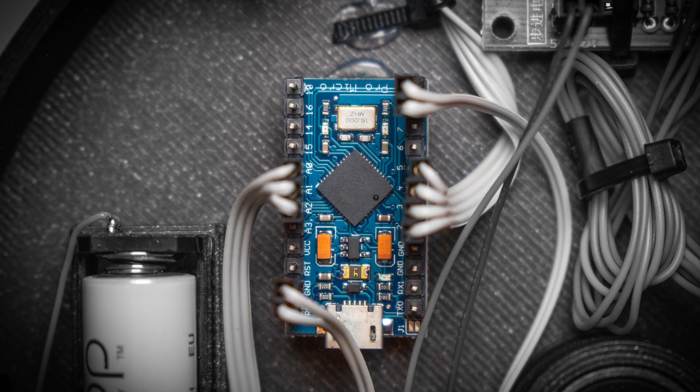I still had a Pro Micro lying around, a cheap 32U4 based model from an earlier build project of Tom Stanton's awesome joystick, which has in the meantime evolved from a pure stick into more of a yoke version, to cope with my aircraft preferences in Microsoft Flight Simulator beta.

And yes, it is currently very broken. Shout out to Tom for his awesome projects and his work in general. And if you don't know him, where have you been? I mean, seriously. But honestly, every small Arduino would work fine here.

And finally, the power supply. As stated above, I'm living in my kind of fantasy world where power is not an issue at all and where simplicity is king. I don't want four batteries tangled up in every single project I do, then virtually disappearing forever from my stockpile. So I like to keep things simple and minimal and reduce the number of batteries wherever I can.

This was a very bad decision, as the motor draws a lot of power, and simply powering all parts and the motor from one battery is not enough. Especially as I wanted to drive the supply line with 5 volts, which means the voltage of the battery needs to be boosted from 1.5, or rather 1.2 in case of a rechargeable battery, up to 5 volts. The bigger the voltage gap, the more amperes need to be pulled from the primary power source to substitute the voltage difference. It's possible to achieve this, but only if all components, including the battery, can handle the demands. It definitely gets more challenging to make it work.

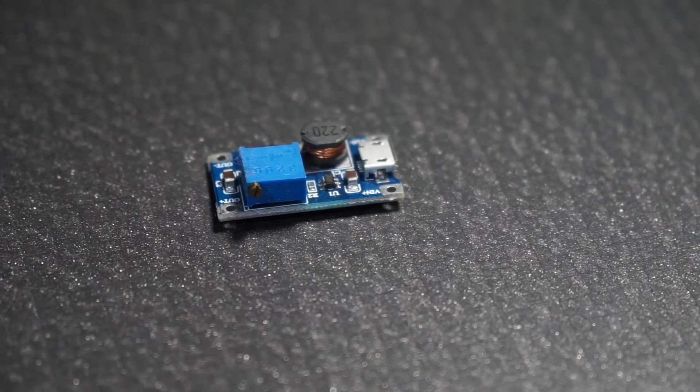Well, in hindsight, I was actually doing the opposite of keeping it simple. I should have just added another battery from the start. Lesson learned. Anyway, I was first using some voltage boosters I had lying around, but the first attempts were unspectacular, and actually nothing was working.

Turns out boosting from as low as 1.2 volts is actually not so simple and common for those circuitries, and it took me a couple of attempts to find a circuitry that was able to maintain even the unloaded 5 volts from the battery. I finally went to Pololu, which has a great range of cheap, small but yet powerful power conversion boards available, and a couple of them are also capable of boosting from 1.5 or 1.2 volts, which was exactly what I needed.

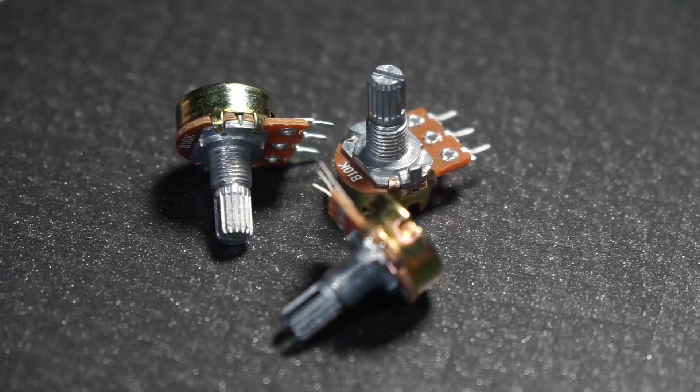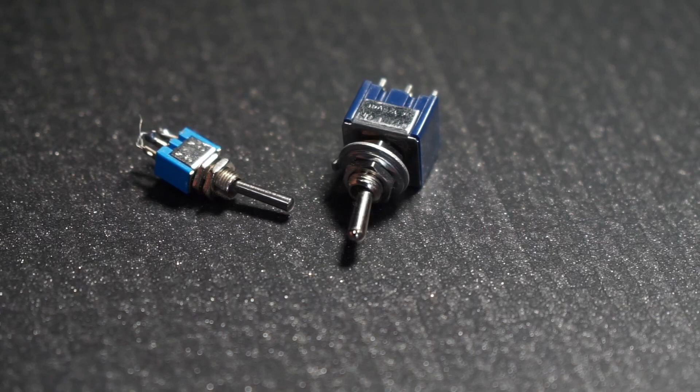Last but not least, for controlling the speed, a simple potentiometer would do. I always have some basic ones in stock for these kinds of projects. And then for changing directions, there is the need for a small switch, and I also have those in stock. And then finally, I wanted to have a flip switch to disconnect the battery from any consumer at all, so the batteries aren't drained over time when I'm not using this rotating table.

Chapter 3: The 3D model. So with my list of components finalized, it was time to start designing the case.

That includes a bottom part, the stator, a movable top part, the rotator, a mounting plate or control plate for mounting the potentiometer, the button and the flip switch, mounts for the motor and the rest of the parts, and a suspension for the rotator so it can rotate freely with the ability to support even a bit heavier models. And that's it. As always, I did my design work in Fusion 360.

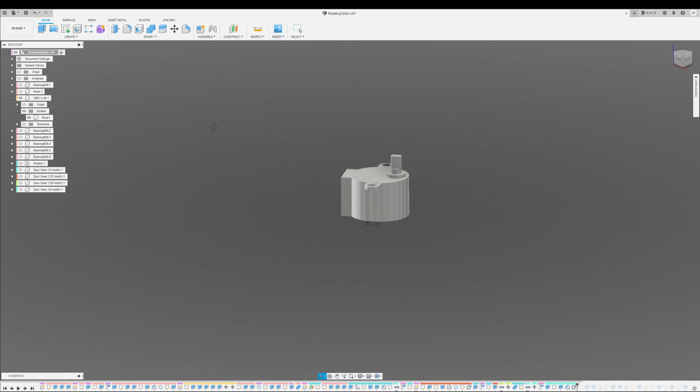For this workflow that I'm using, it is very recommended to mock up all the components that need to be mounted later. This way I was able to shift and push the parts around until I found a setup that made sense to me. Except the positioning of the motor and the controls, only the placement of the Arduino was important, so that I would be able to mount USB cables to it later to program it.

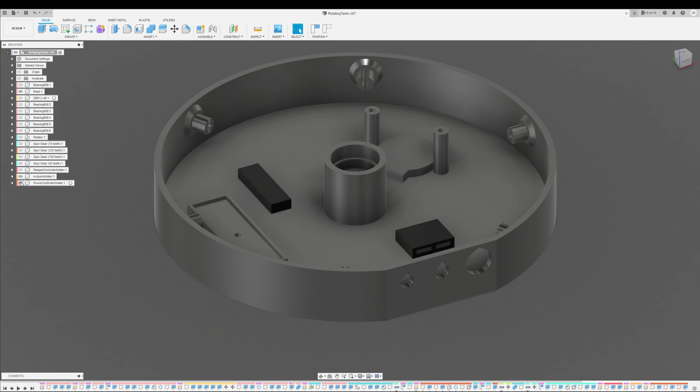To keep it simple and also flexible, I decided against precise mounts for all components and instead printed a couple of these profiles that I glued into the base and then fixed the PCBs with zip ties.

For the gears, I used the Fusion gear scripts. I didn't pay too much attention in the beginning to the ratios and the sizes of the two just yet, as I was certain they would be off anyways. And to be honest, it's simple enough to print other ratios later.

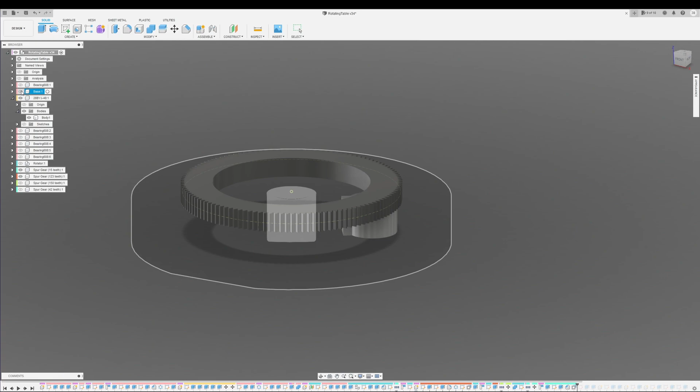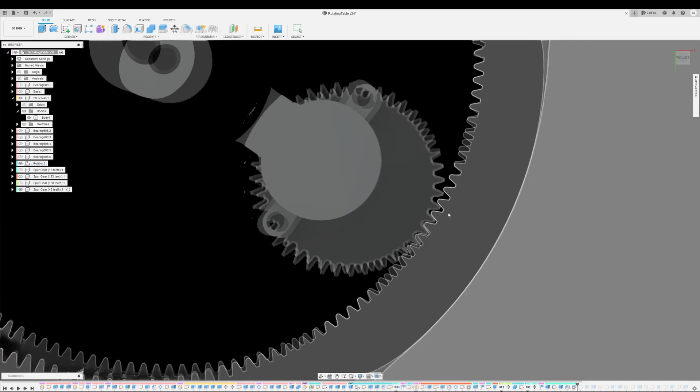I am not aware of a proper way to print the outside gear, which is facing inwards, so I designed just a negative shape and subtracted that from the rotator internal parts. I am no mechanical engineer, but I'm pretty certain this messes up the weird magic that gears involve. But YouTube is full of tutorials using this approach, so it cannot be bad, right?

Chapter 4, the build. So this model after printing is relatively simple to clean up, only a bit of support material under the bearings. Then mounting the parts for the control panel.

And then finally mounting the bearings. Initially I wanted to screw those in place, but that was actually not necessary.

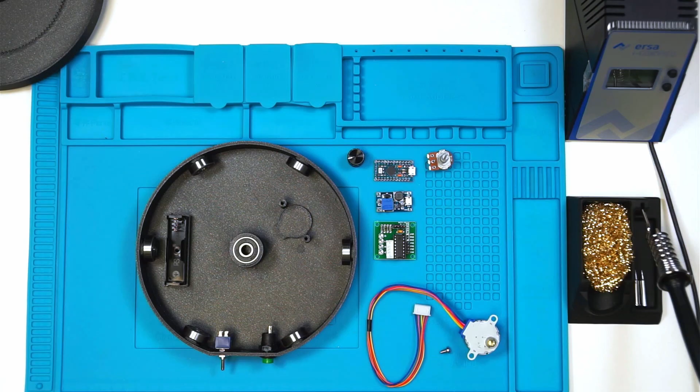So as mentioned in the beginning, I didn't want to fix all the positions of the components already in the design, so that is why I'm now gluing those frames into the base and then attaching the components to those frames.

So I have to say this looks relatively tidy and organized. And I was actually hoping to keep this standard for the rest of the wiring, but you will see in a moment that I, to my own personal judgment, think that I failed with that. Anyways.

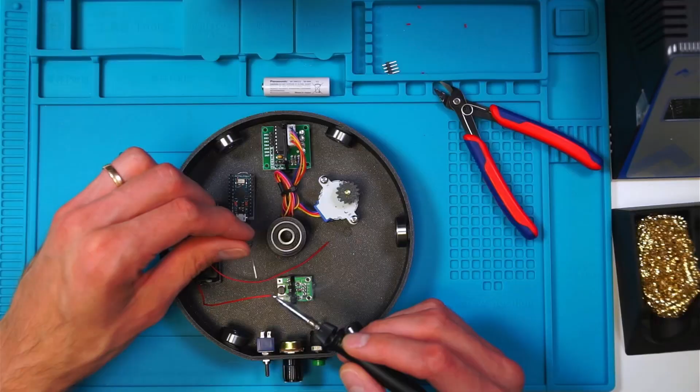At this point I decided that it is time to check if my power supply circuitry actually works before I continue any further magic with the motor and the controls.

So as you can see, I pulled out the big guns and started crimping. I definitely favor cable connections that are removable later, either for debugging or for decomposition of my projects, but it's definitely more work to get it done in the first place.

And again, mental note to myself, I should really think about cable management up front and not like here, make it up while I'm going, because you can already see the mess evolving.

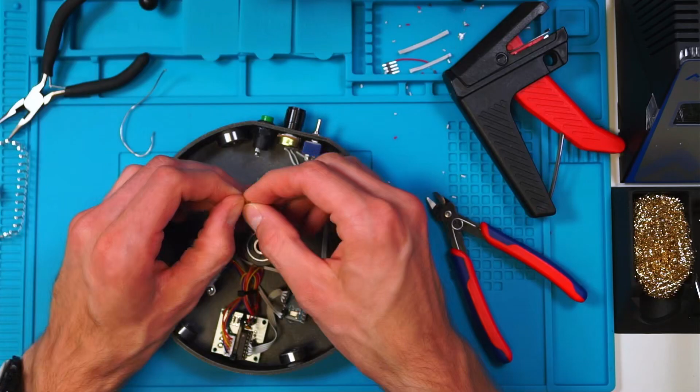Now this is the moment in time when I realized that I have a real problem. I noticed that touching the motor slightly was enough to let the LEDs of the other components blink, which means that there's a serious problem with the voltage supply level. And here the journey began.

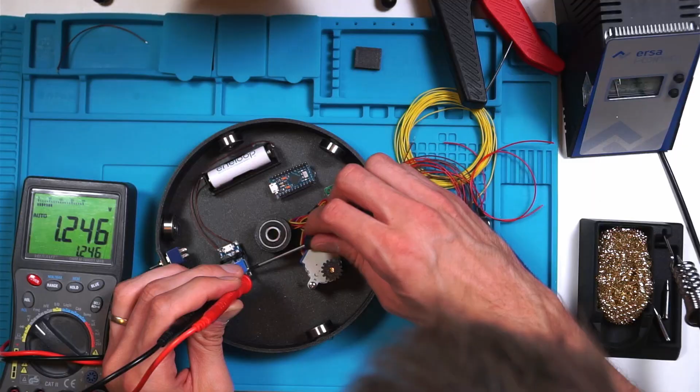Well, to be completely honest, this was already the second attempt to make it work. Going back to the intro, this was the power supply I was first using. But it didn't matter how hard I tried to adjust the output power, nothing was coming out more than those 1.2 volts from the battery directly, which is at least something.

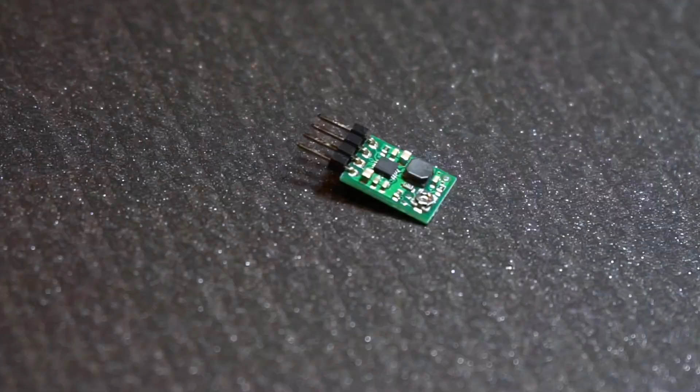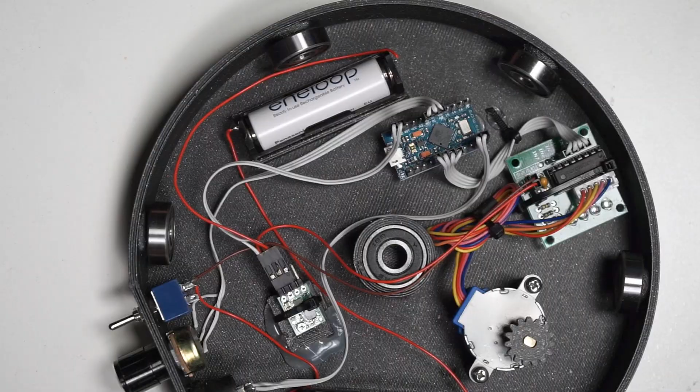The outcome of the second attempt you have already seen now. And then I went to Pololu and got myself a really tiny and really nice circuitry that can provide, even from as low as 1.2 volts, clean 5 volt outputs that are even adjustable. Put it all together and here is the final result.

Yes, the cables are a mess, but it is working. However, with one battery cell it was still very weak and the motor easily stopped, which is why I came to my senses and just added a second battery, which solved all my problems.

And this brings me to the last chapter for this project, writing code for the Arduino. Almost all electronic aspects of this project are very simple to handle with an Arduino. In fact, every microprocessor in general.

Only driving the stepper motor requires a bit more effort, as 4 output pins need to be driven correctly to turn the 2 coils of the stepper motor. For this, also a notion of time is necessary to be able to drive a certain amount of steps within a given time, usually referred to as speed.

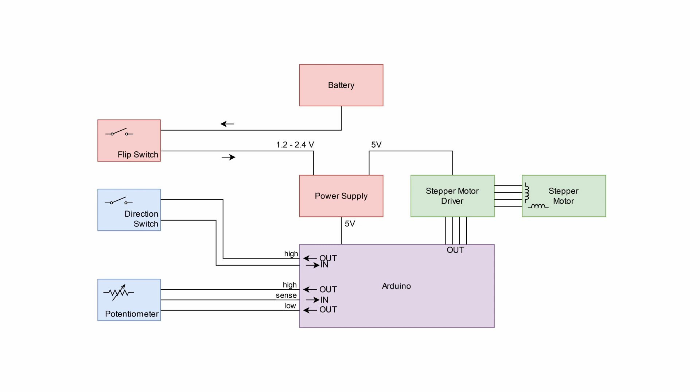Let me quickly go over the different components. At the top, the stepper library is included. Next, I define all my pin macros to have all the pin definitions in one place in case I need to change it later, something I definitely recommend doing. At last, I also define the absolute max speed for the motor.

Next, some variables including the stepper object, and then already the setup function that every Arduino project has at its foundation. Here, I set up the stepper default settings and configured the general purpose input-output pins, also referred to as GPIOs. The supply lines for the switch and the potentiometer I'm also driving as Arduino outputs, so I need to set them up here as well.

And then the loop function, which is called by the Arduino internal code over and over into all eternity. Here, for each pass through, I call the stepper service function that keeps track of time and when it is necessary to move the motor one step further. Next, I'm simply reading the analog line coming from the potentiometer and set the speed for the stepper.

It would be possible to program this in a much smarter way and only change the speed when there is a significant change in input level, but honestly, this is not worth the time spent on it and way simpler this way. And finally, I'm checking whether my push button has been pushed, and if so, I reverse my internal reverse variable that steers the rotation direction.

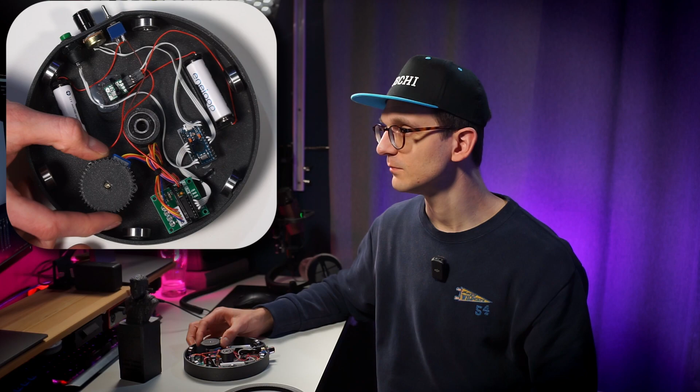Yeah, here it's very nicely visible how crooked the motor is. I suspect because of the gearbox. There's a huge amount of play in there. I can rock it back and forth. I mean, I can rotate it and wiggle it quite a bit, and then even rock the axis back and forth quite substantially, which for the specification I had in the beginning for precise motion is the death. So poor choice from the get-go.

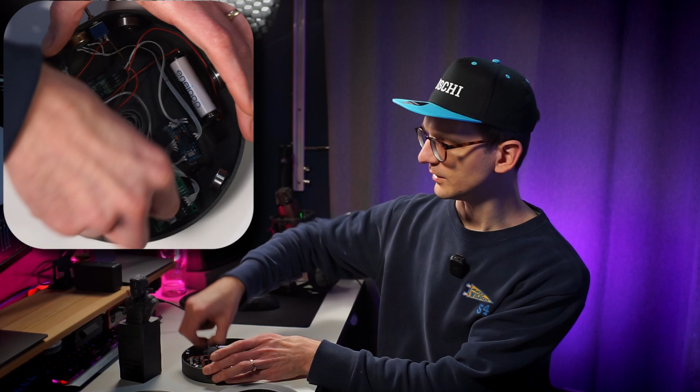If you ask me how to improve, obviously I would rip out the motor and throw it out of the window immediately. Replace it with a directly driven NEMA 17, for example, in the pancake version, a very small one, and check out if that is up to the task, rotating that stuff. The only other thing I would definitely change in the future is the power supply and also maybe the cable management for aesthetics. As I said in the video, I just printed different versions of the gears to cover the different speed regimes because the motor is not capable of going very slow and also very fast at the same time, because then it's skipping steps and it's just not working fine.

So I print different sizes, and if I want to have it really slow, I take the really slow version with the small gear at the motor and a larger one on the other side. And if I want to have a faster one, then I take a bigger one at the motor.